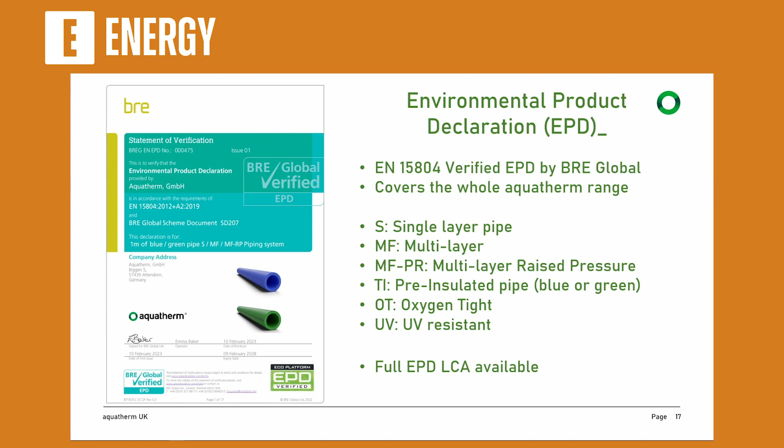We have various different ranges, so the pre-insulated pipe is what we're here today to talk about as district heating companies. We do offer internal pipework in buildings as well, which have their own EPDs. Our EPD, as I mentioned, is a full LCA, which is a life cycle assessment. As I said, going right up to the end of the pipe's life and its recycling.

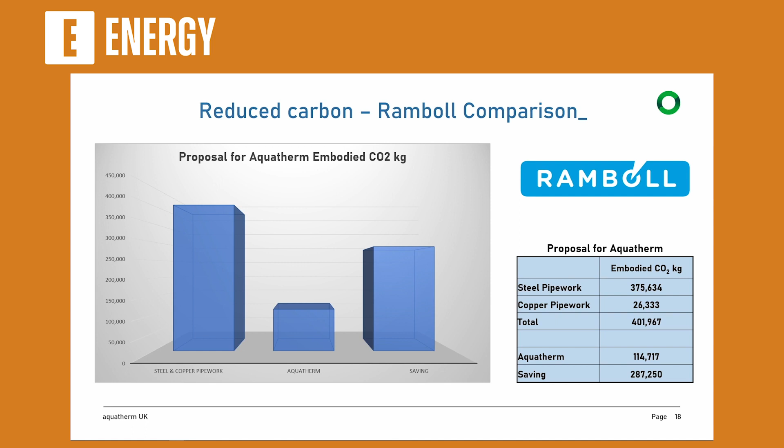What this means, essentially, as done with a study we had with a project in London with Ramboll. If I just point out on here. So originally the proposal was for steel and copper pipework to be used inside of a commercial building in London. You see that the total embodied carbon in the project was going to be around 401 tonnes. We were able to, using our EPD, redesign the system into Aquatherm and offer only 114 tonnes of embodied carbon. So a total saving in this project of over 280 tonnes of embodied carbon.

BRE, I believe, are here somewhere, and I think those guys will tell you that there's significant funding benefits to projects if you can demonstrate that sort of saving on embodied carbon.

The other benefit we see in the marketplace is in terms of cost. So the material cost is one factor we would look at. At certain sizes, plastics will be cheaper to purchase than steel pipework. But actually, the installation time and the labour costs on site is where we'll really see a saving. So these figures are quite small.

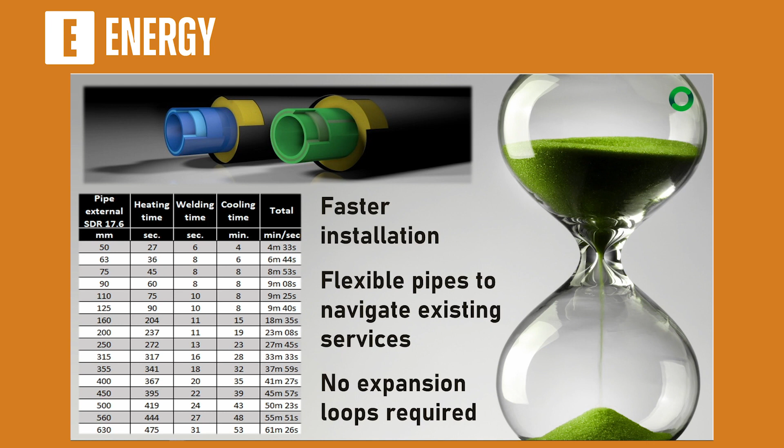In that respect, if there's any hidden services under the ground that don't always become clear until you dig up the roads, then they're flexible to come around it. We won't always need to be adding in extra elbows into the system. The key point at the bottom there as well is that there's no expansion loops required with Aquatherm. When the pipe's buried under the ground, because of the polypropylene properties, it won't be expanding in a horizontal direction. That will just be absorbed within the pipe wall.

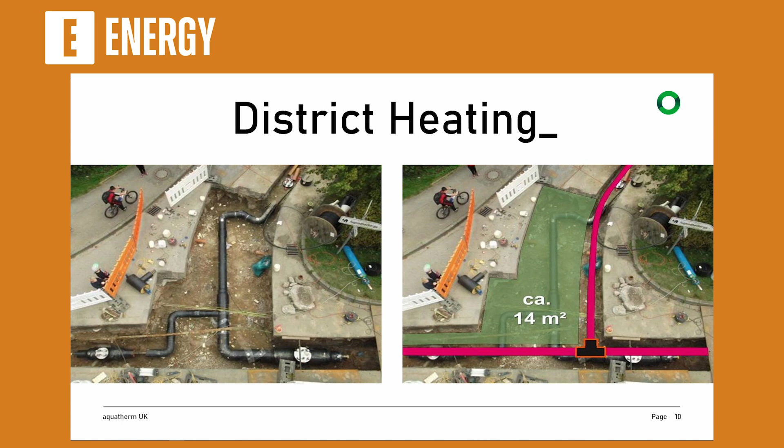What this means is, if we look at a project like this that was done in Germany with steel, they had to put an expansion loop in here at this change of direction. You can see the extra civils costs that they've had to incur here, the disruption to this poor kid on his bike, to the local community there. If you did this with an Aquatherm polypropylene pipework, you would save all of this civils cost here. You would be able to do a straight run in the T-junction there, causing considerably less disruption, less time on site, less waste on site, less material to be purchased. This is a really key factor to consider in a heat network project.

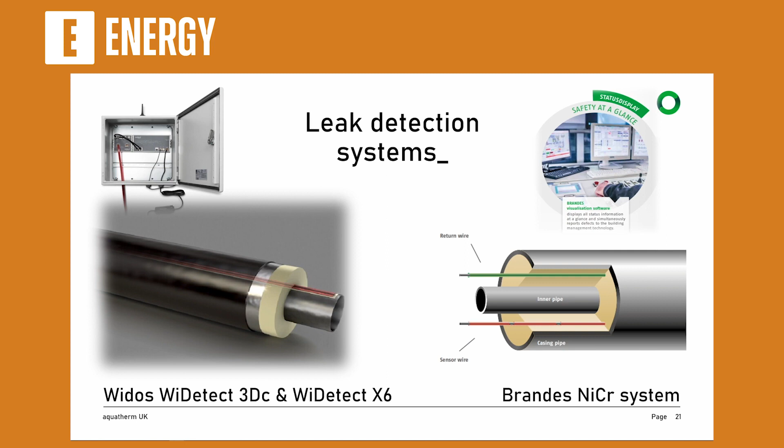Leak detection systems, this is something that's quite new to Aquatherm. Traditionally with a plastic system we wouldn't necessarily see a need for leak detection, but in recent projects, it's something that's been required by the end user, the end client. So this is something that would be available. As I said, normally with a plastic, with it being fully welded, we wouldn't necessarily need to see leak detection because there'll be no corrosion if water gets into the insulation foam on a plastic. However, it's sometimes a requirement. So we have 2 options: the 2-pipe system with Brandes and the Widos, the tape across the top of the pipe.

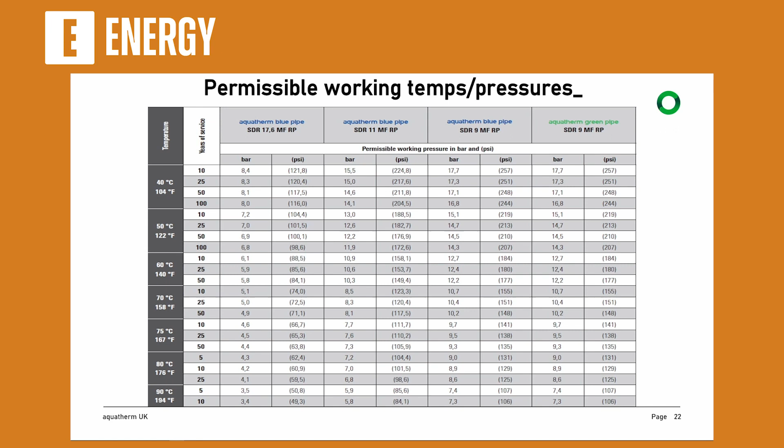Again, this information is quite small, but just to give you an idea of the lifetime of the pipework. Where we're looking at the 4th and 5th generation systems here, we could quite comfortably offer up to 100-year service for the pipe buried beneath the ground, up to about 14 to 15 bar. As we get warmer, obviously the service life will reduce, but we have pipework in Gateshead, which is operating currently at around 85 degrees as well. So it's quite flexible in what we can offer, and design help's always available from Aquatherm.

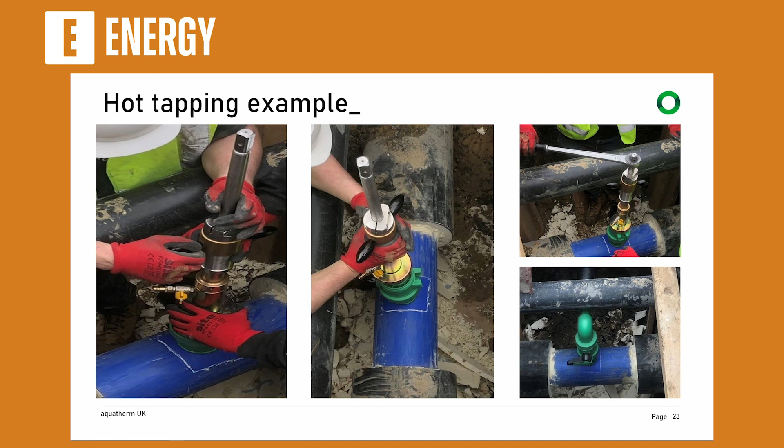I'm not the most technical of people, so I can't talk you through it entirely, but essentially you have a prefabricated valve which is welded onto the outside of the pipe. The system will have its temperature lowered to 60 degrees and to 6 bar, and that will allow you to build away from your prefabricated valve. At the end of that, you'll just open the valve and then the system will continue to flow. So there's no need to shut down and cut off the heating system to an entire area if you're looking to extend the district heat network.

Other services that we do offer in support: we're aware that it's a fairly new product into the market, plastics into district heating networks. So we have a full training service available for any installers, and that's how you come by your warranty. So once anyone's trained, then there is a 10-year warranty on every single installation done by that company. We offer full technical support, so we can redesign systems.

We find actually with the smooth bore of a plastic compared to a steel pipe that it is possible to downsize the actual design. We know most systems will be designed in steel, that's how they come. But we do have the option we can downsize or increase flow rates if we need to.

We offer site support as well as a prefabrication service, and we do offer a full takeoff service as well, so we can convert anything from steel into Aquatherm or to other plastic. And all of our products are available on ComSoft, so if you've got a system designed on there, you can do a straight swap straight over to Aquatherm pipework.

I believe that's my last slide. There will be questions at the end, I believe, Simon, so I'm sure you all have loads for me.

Thanks very much indeed. I'd now like to invite Stephen Hart to come up. Stephen is from Baxi. I'll allow him to introduce himself a bit more and explain what he does. So I'll hand over the controls to Stephen. Thanks very much.

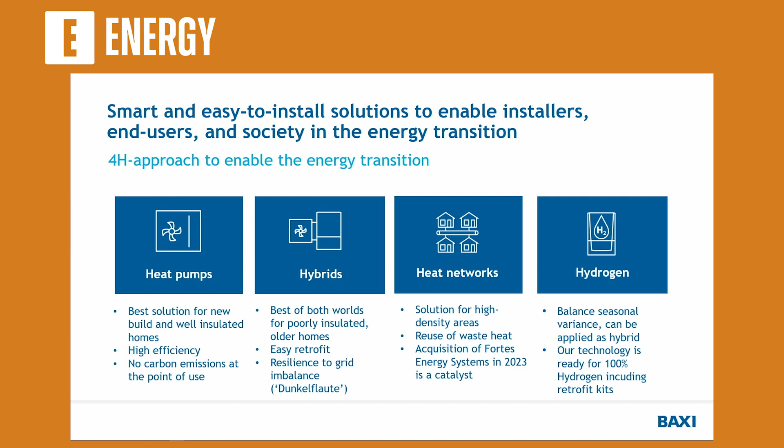We know that in the Netherlands we're seeing a very big uptake in hybrid heat pumps, where perhaps just like the advice on heat networks, the advice is choose a heat pump to service 80% of your heat load through the year, and then for the very coldest days, maybe it's okay to burn gas as a peak load boiler. That gas, of course, can be natural gas, but maybe tomorrow it's biogas or 100% hydrogen, and our boilers are ready to take any of those sources. But of course, heat networks are now a very big part of what we're offering.

One of the businesses that Baxi brought into the group a few years ago was Packaged Plant Solutions, and we turned that into Baxi Packaged Systems manufacturing in our facility in Preston. Here we're manufacturing packaged plant rooms, skidded equipment, etc. And we think that hybrid packaged energy centres are a really big important part of it. This particular energy centre went on the Didam scheme in the Netherlands.

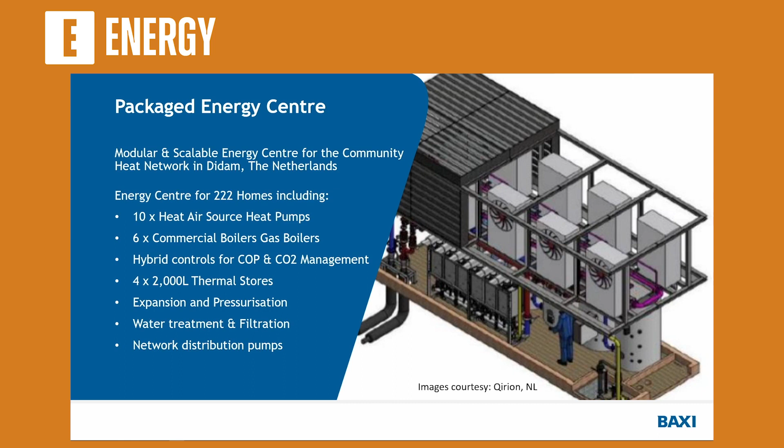And it shows on the roof a number of cascaded air source heat pumps, high temperature, so you can get 75 or even 80 degrees off in the first floor or on the ground floor. You've then got cascaded boilers. Again, they are natural gas, but they're future-proof through a retrofit kit to 100% hydrogen or biogas, should that occur. And then, of course, we have water storage. Very important we decouple the demand and the supply with enough storage. But this is actually existing. This is a great project.

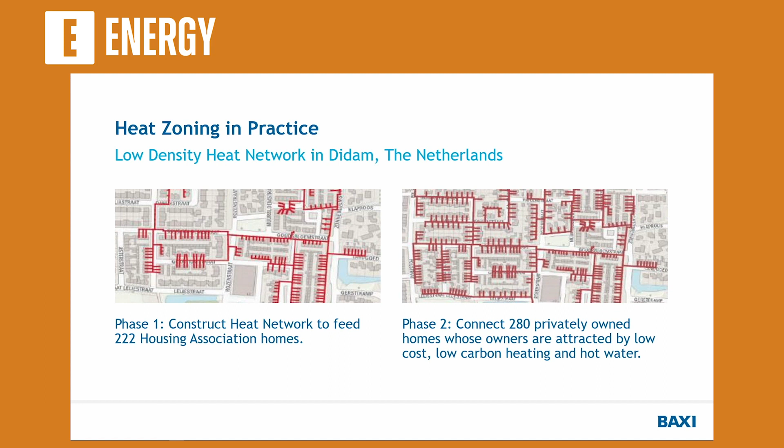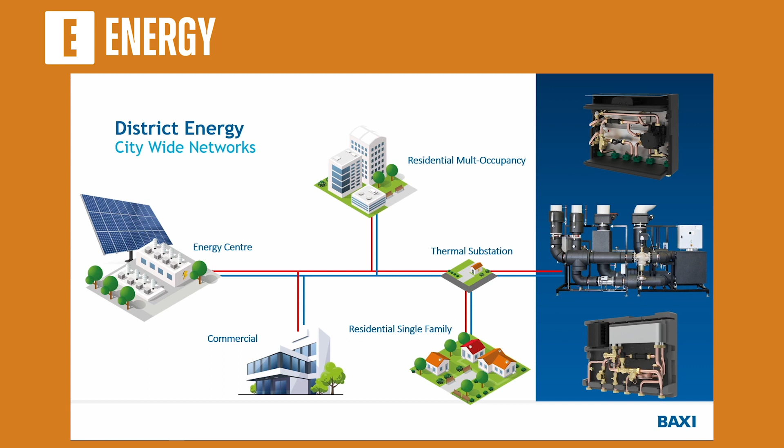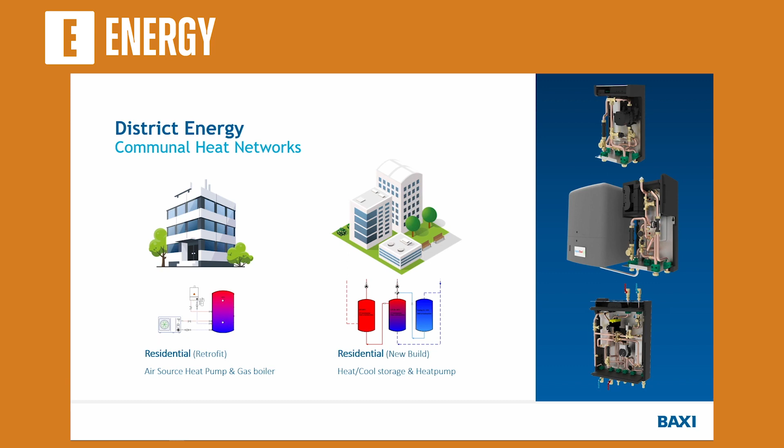So we've got lots of innovations in and around heat interface units, in and around thermal substations. We've got some very big reference projects here in the UK, but we see that getting involved with the BESA testing, approved products are all really important. But whether we're connecting an air source heat pump, whether we're connecting an HIU, or even a larger thermal substation, actually connectivity is the key. It's the key because, of course, we need to connect energy meters so people can get billed for the heat and hot water they consume or the cooling.

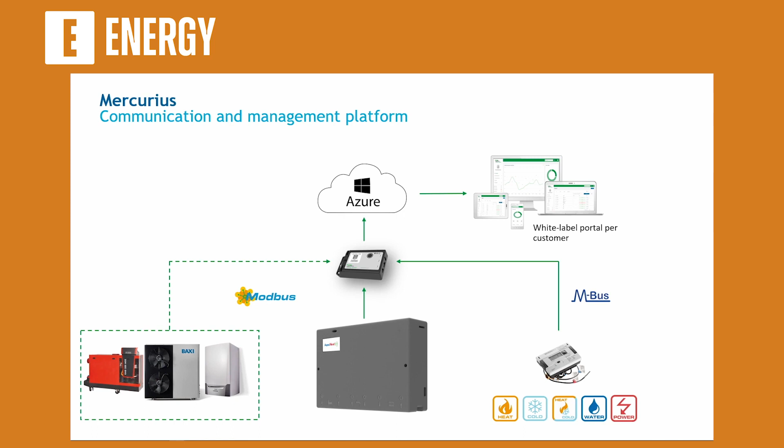But we can also connect our plant room equipment, our heat pumps, our boilers, etc., so we can see what's happening at the plant room. And so if we're also connecting into our electronic HIUs so we can see flows, temperatures, this really allows us to do remote monitoring, remote optimization, and preventative maintenance, because we can now send that through IoT devices. Everything's collected on the cloud.

We have over 60,000 devices connected to our Mercurius cloud, and it gives us some insights that we can really leverage in terms of communication, where we're using SIM cards that roam to the best network they can get. It means that we've got real-time monitoring. But best of all, we can now take our 270 service vans with Baxi engineers in, and we can start to do remote commissioning. We can start to do automated diagnostics.

If something's not right, we can monitor the unit that's not working, and we can detect: is it the unit not working, or is it perhaps a problem in the energy centre, or a problem in the apartment? So we can avoid lots of these ghost call-outs that used to occur with heat interface units. But we also have automated diagnostics.

So our help desks, of course, were put there to help with boiler installations. But we can run automated routines that can help identify if there is a problem in the unit, which problem it is, what component we need to send overnight to put in the back of the van, so the service engineer, when he does have to go out, turns up and his first-time fix rates are as good as anything. And of course, it's about planned preventative maintenance to maintain uptime and reliability of mission-critical systems.

So, of course, we're doing the smart metering, but it's system optimization. Can we, in the summer months, turn the primary supply temperatures down? Best way to do it maybe is try it, see what happens.

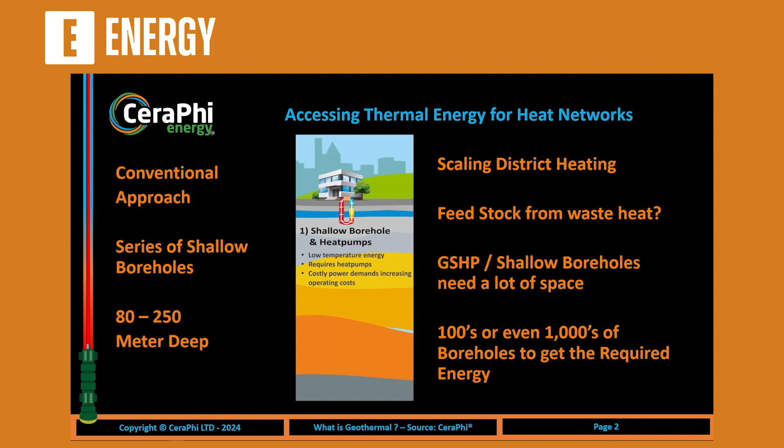And conventionally, we've been looking at ground source heat pumps, a very established business. It's growing, it's still being done, and we're going to continue to do that as part of the process, because not everywhere is suitable for another type of solution. But also in the system we're working with, we're also talking about conventional geothermal.

Conventional geothermal is not suitable everywhere. Not everywhere is Iceland, not everywhere is Indonesia, places where you can drill deep into hot zones and aquifers and create thermal energy. So although it can be done, it's not a scalable solution for everywhere.

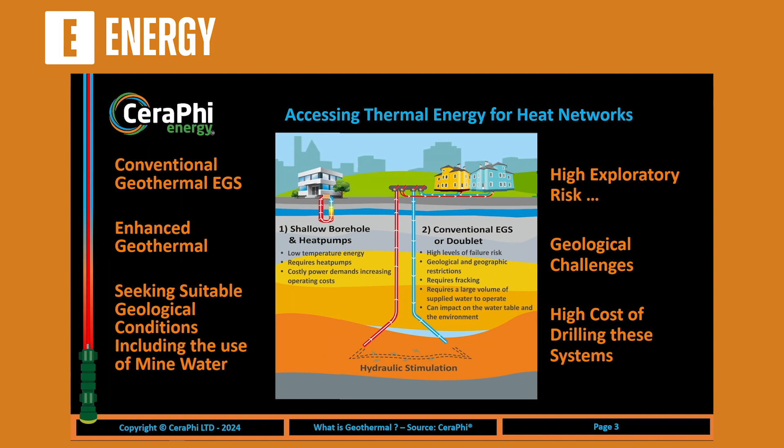So having spent nearly 35 years in the oil and gas industry, one thing that I've recognised is that the deeper you go, the hotter it gets. And generally in oil and gas, when we drill deep, heat becomes a problem, because we spend a long time trying to cool down muds and various other things to keep the drilling going deeper, otherwise you have problems with drilling.

So what we've done is basically take that technology a step further for ground source heat pumps, drilling to depths of around 1,000 metres, 1,500 metres, 2 kilometres, which is more or less the average depths we need to get to heat network temperatures, which is 40 to 60 degrees ideally, to give us the temperatures we need for heating and for hot water. So they're the focus points for where we're trying to get to in this next stage of revolution of heat network development.

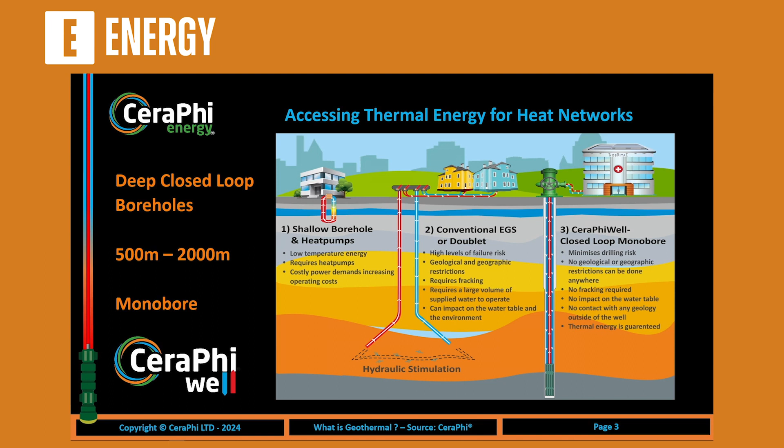By doing that also, we then provide companies who are manufacturing heat pumps and energy storage systems and various other things a better quality of energy for them to actually use in the process, which increases the coefficient of performance and reduces the energy supply they need to actually pump their systems or keep their systems moving forward. So it's an added benefit for their systems.

It increases by depth, but not only the temperature, it also increases the quality of energy. So if you look at a conventional ground source loop, we drill a well, we put a loop in it, we circulate fluids around a 40 millimetre, 50 millimetre tube, and that goes up to the surface. Our designers are using a full system, what we call a coaxial design. So it's using a full bore of the well, fully cased.

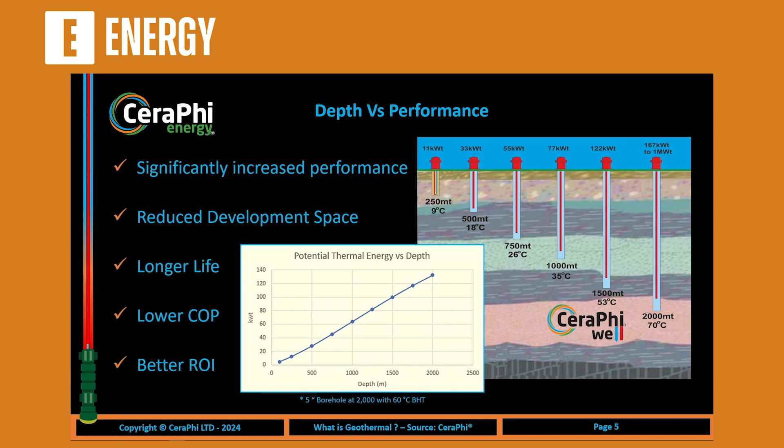We flow down the outside of the well, we come back the inside of the well, and because it's running at a very low temperature flow, so we're only flowing maybe 1.2 litres a second in a fairly large borehole, the conduction's very quick. So the conduction actually goes right through very quick, and we get the full maximum benefit of that temperature at the bottom of the well back to the surface quickly. That increases the performance, it reduces the footprint, so the deeper you go, the less wells you need, so you can actually make projects work in environments where space is an issue.

We also then increase the temperature, meaning the heat pump coefficient is increased and the system economics work a lot better. We're able to get costs down on commercial scale products to as low as 2 cents or 2 pence per kilowatt hour from an energy point of view, which is very, very low in this case. To do this, we have to think a little bit differently.

So we've been working with overseas manufacturers of typical geotechnic type rigs to increase the weight on bit and increase the ability to drill deep wells with the type of technology we would normally use in oil and gas, but actually applied to a civil engineering and more of a construction-based application. We don't want to include or induce oil and gas costs into this business, because this is a utilities market. It's not an oil and gas business where you get a quicker return and a high return on investment. We've got to look at keeping costs down.

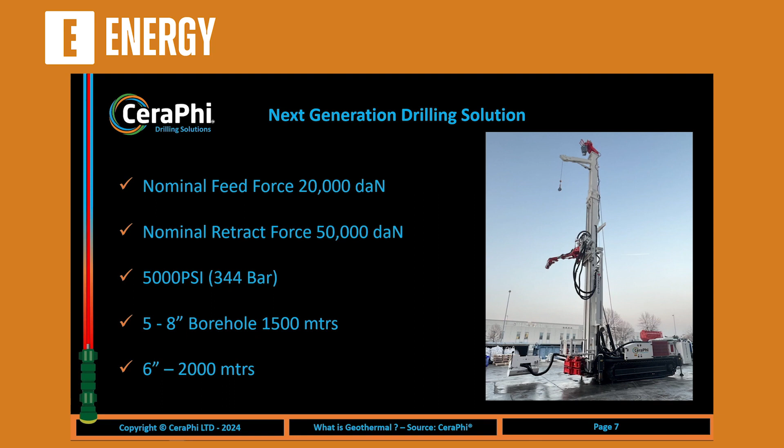A typical oil and gas rig drilling down to 2 kilometres, similar to what they're doing in Stoke and other things at the moment, you're talking 25,000, 30,000 a day for a rig. This rig is a bare fraction of that in cost for that type of application. So this is what we need to do to move forward to get into that deeper generation. I've got a little video of a project that we've done.

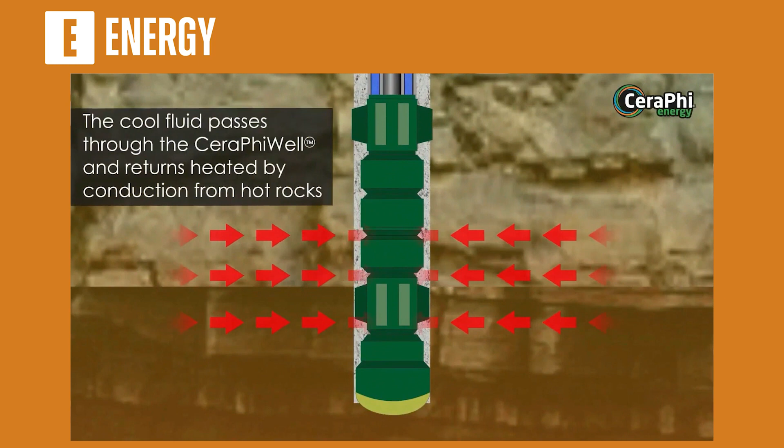In March 2023, CeraPhi Energy was awarded a match-funded grant from the Net Zero Technology Centre, a UK government technology accelerator platform designed to support innovation and technology. The CeraPhiWell works through conduction. It takes heat that is present at the bottom of the well to the surface, where it is processed for its required energy use. The CeraPhiWell system uses a pipe of 2-inch high-density polyethylene, or HDPE, to increase integrity and allow the fitting of centralisers and other technical components.

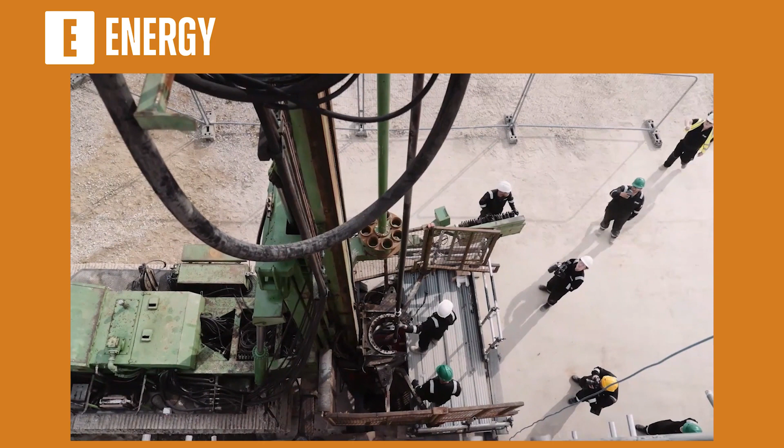Over 160 12-metre sections were welded together on site by the CeraPhi team, reaching a total depth of 2,000 metres and using a custom-designed scaffold and injector system. HDPE pipe usually has a low temperature threshold.

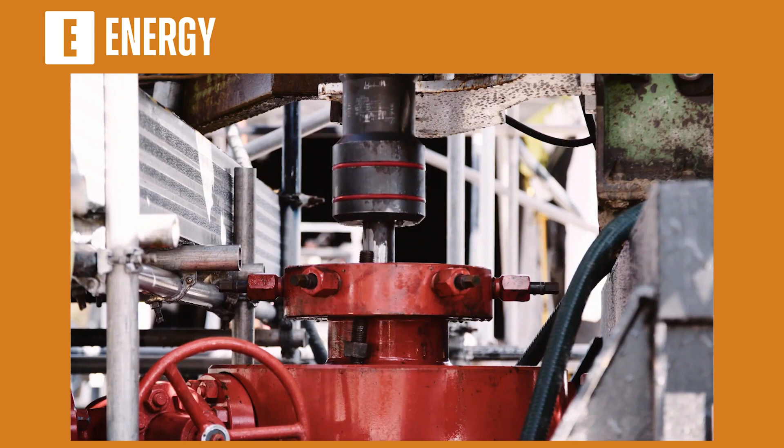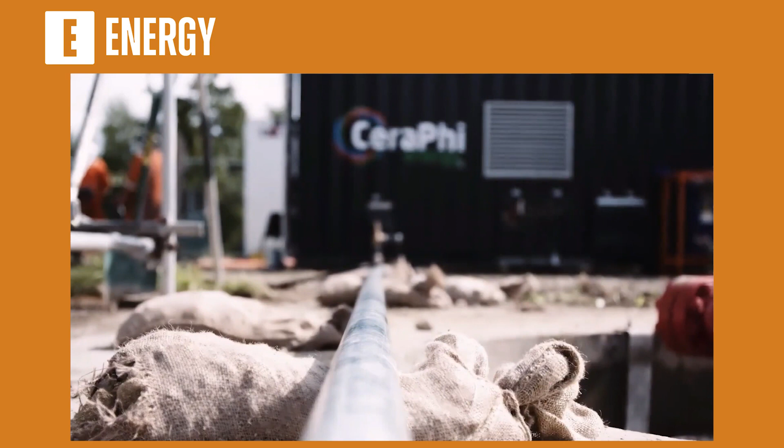However, the CeraPhi team has broken records installing the system to 2,000 metres and to the maximum designed operating temperature of 90 degrees Celsius. Once the desired depth of pipe installation was achieved, the wellhead was installed and the interconnecting surface pipework was connected to the CeraPhi True unit, another proprietary CeraPhi design.

The CeraPhi True unit will operate for a number of weeks, capturing real-time data used to further refine and adapt the performance of the CeraPhiWell system design. CeraPhi has been working with industry experts to ensure accurate measurements of the data that's been collected by using their domain expertise, digital technologies, sensors, controls, fibre optic systems, and the analysis of the data in order to ensure that the production of geothermal heat is reliable, economic, predictable, and safe.

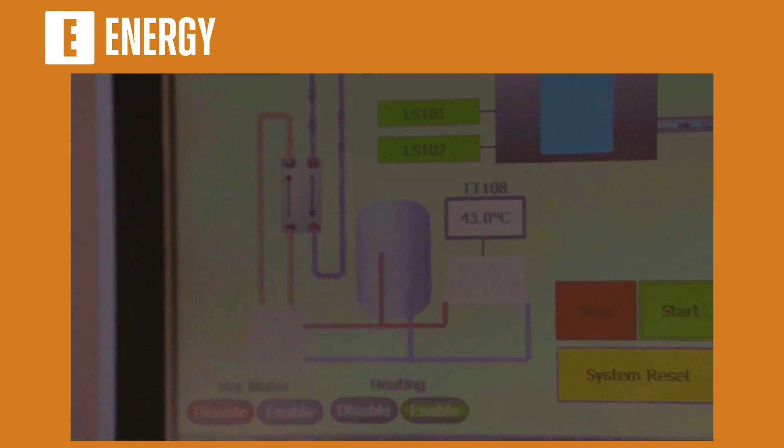So it's quiet here, all the tests have finished. You've got the results, you've got the data. What did you find? Well, we ran the test really for about 4 weeks. The first test we did for about a week was just to extrapolate and take out as much heat as we could from the well to understand the maximum temperatures we were getting. We had a 30-degree delta, so we were at 70 degrees at the bottom and getting just around 42 degrees at the top. And then the second and third week, we ran the system for various different stages.

So we ran it for a period of time, injecting cooler temperatures, to see what the balance of that was from the thermal extraction to be able to increase that temperature to the surface. And were you able to get the higher temperatures? Yeah, and also what that simulates is the draw of heat from the system. Just this one section of pipe, it's not representing a big loop going around, say, like a new development. It's only representing 20-odd metres of the pipe loop.

But that's actually demonstrating that 20 metres is sufficient energy for 22 homes. So if this was 300 or 400 metres long going through a distributed network through a housing estate, this particular system could run 300 homes quite easily. 300 homes, that's incredible. Are we talking about some enormous big construction on the side of your house? No, not at all. The energy centres on these larger developments are no bigger than a large container or a double garage, and they would be sufficient to run at least 300 homes.

And then the connection to the property would just come in with a hot water line which would connect to your heat pumps, and that would be fed literally on tap all the time, so you haven't got to heat it up. It's there all the time. How big is that? Are we talking about that tiny little box there? Yeah, that is the heat pump.

Are you looking to drill your own holes that are not repurposing an old oil or gas well? Yeah, we've already started, and we've started shallow, but we intend to go deeper and deeper as we do this. And we have to gain public confidence and public engagement to do that. But at the end of the day, there's far more volume of energy in a deeper well using our system as opposed to the conventional ground source heat pumps, which are loops in the ground.